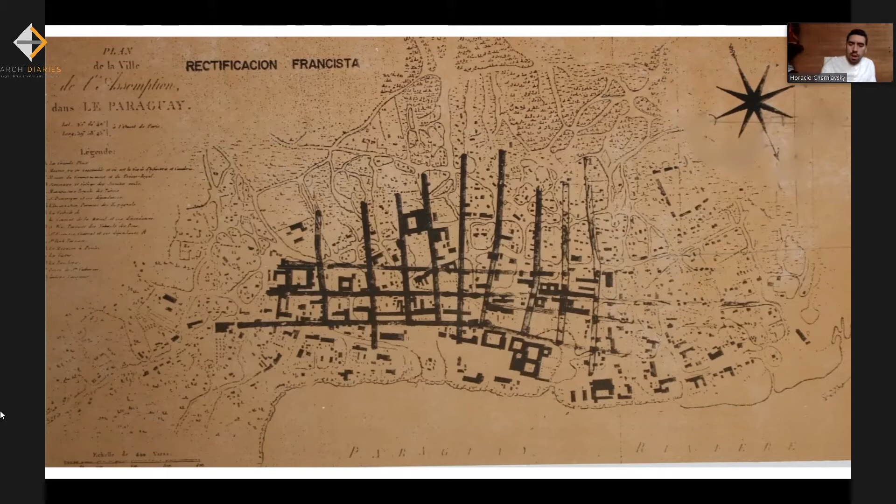So importing a wrong model is what today we still see as an urban problem, because of the rainfall and because it's a model that did not go along with the existing topography.

This is Asunción and the urban sprawl of the metropolitan region.

525,000 people live in Asunción, but 2.6 million people use Asunción during the day. And those 2 million people live in the outskirts of the city.

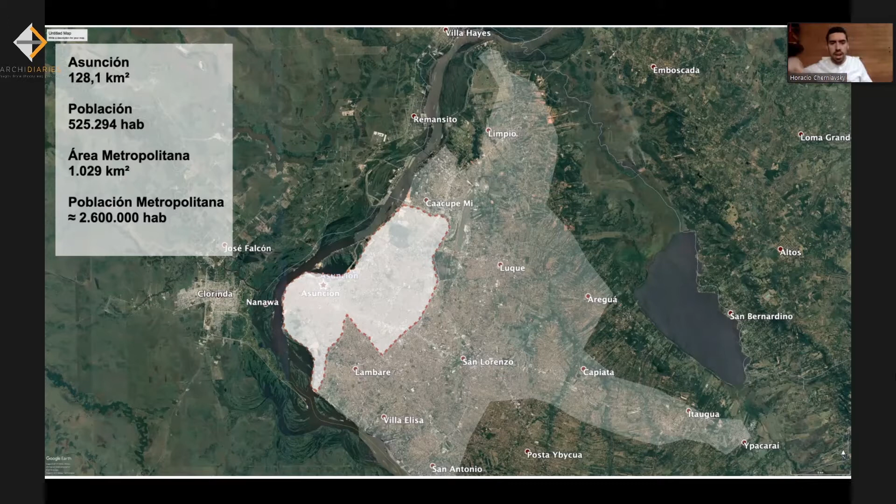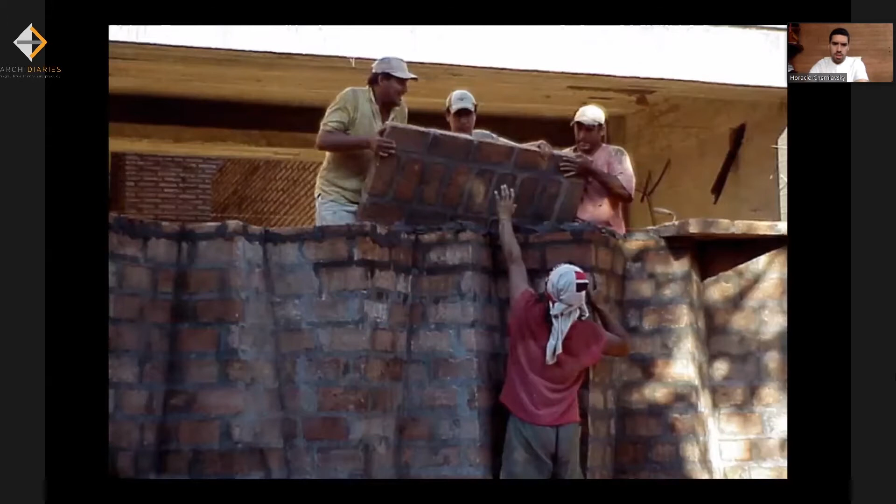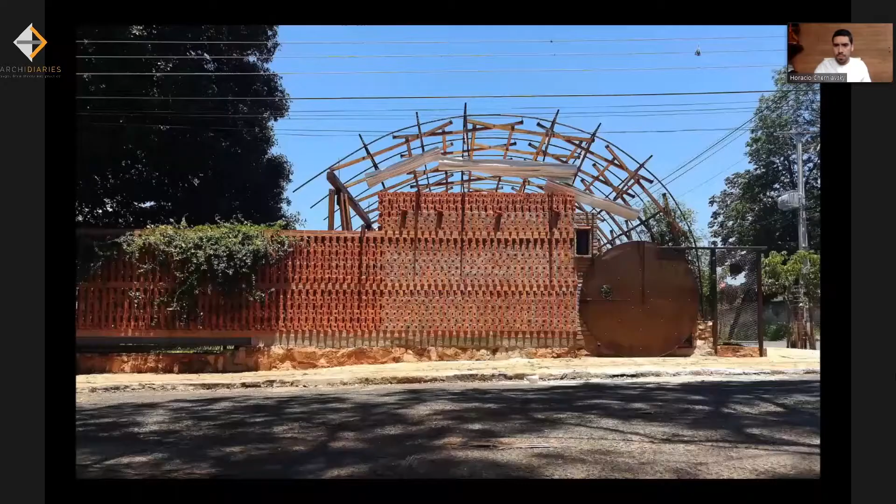All of this international and media attention that Paraguay has right now is something that came up in the last 20 years, with the architectures of Solano Benítez, Javier Corbalán, Luis Elgue, José Cubilla, whom I worked with, Sergio Fanego, Sergio Ruggeri, TDA, Miguel Duarte, Sonia Carísimo y Francisco Tomboli, Lucas Fuster.

These are some generations of architects that belong to a group of friends and colleagues that find themselves in the academic sphere, teaching at the public university. So we belong somehow to that group and train of thought that started 20 or so years ago.

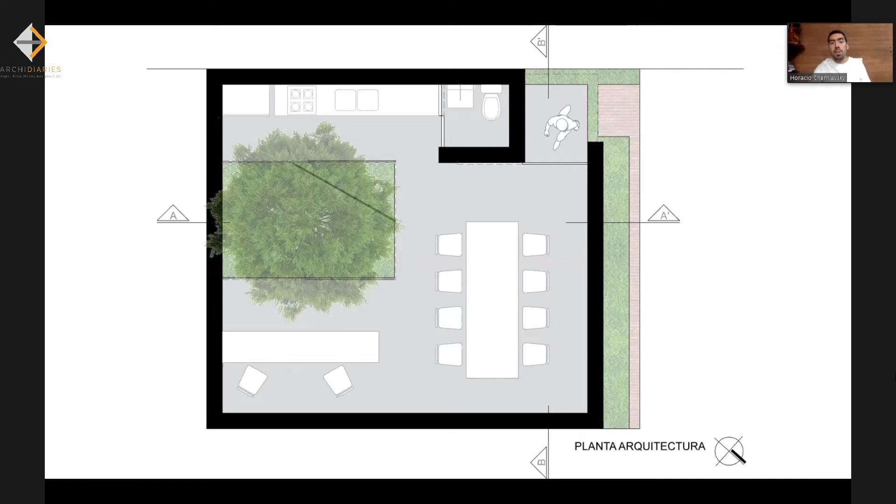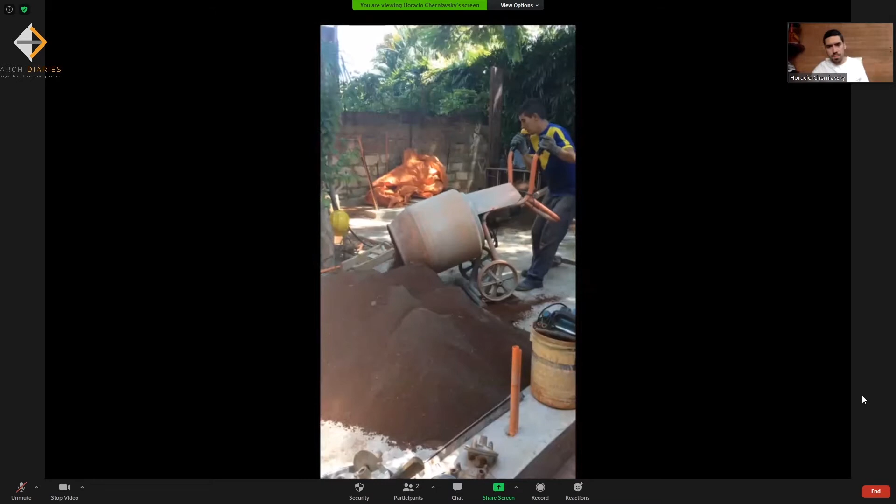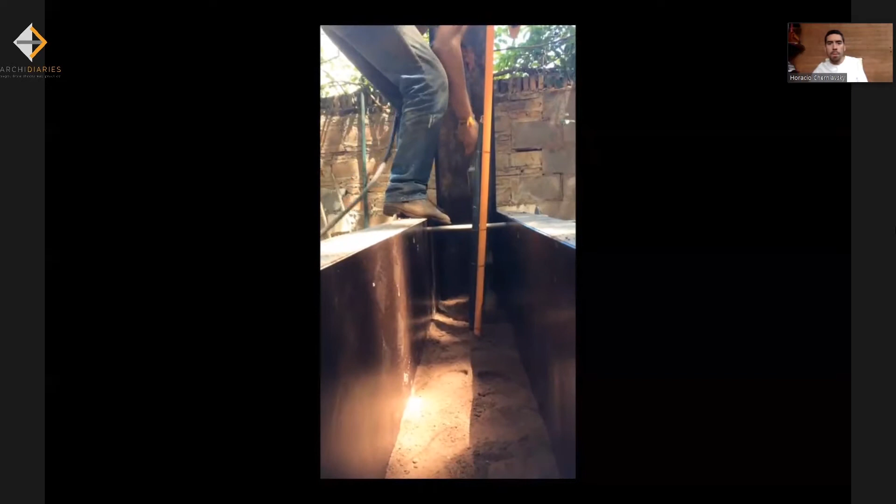The building techniques we use are earth walls that we built like this. We added 5% of cement to the earth. As you can see, the earth and the cement are very fine, and they have to be a little bit humid. So we used pneumatic pistons to compress the earth.

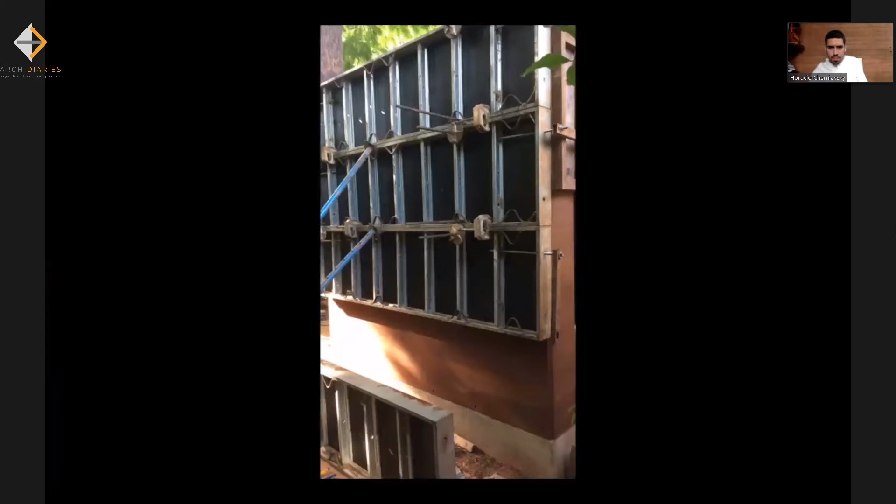That's the construction process, and that was our first wall. Building process. And those were the four workers that built the office. We like to give credit to them.

So this is how the space looked like once the light came in, and we need to speak about shadow in order to speak about light. And if we speak about cool places, which are places that we need here because of our climate, then we still need a little bit of light.

Natural light, so we decided to do this opening. That's related to the tree that's outside. We normally look outside of architecture because we find a lot of references for the work we do, and we find a lot of inspiration for what we have to do.

Eduardo Chillida is a Spanish sculptor, which we admire a lot, and it's always been a reference for us. The idea of the sculpture of space with matter and light is something so fundamental that we're tied to that type of thinking.

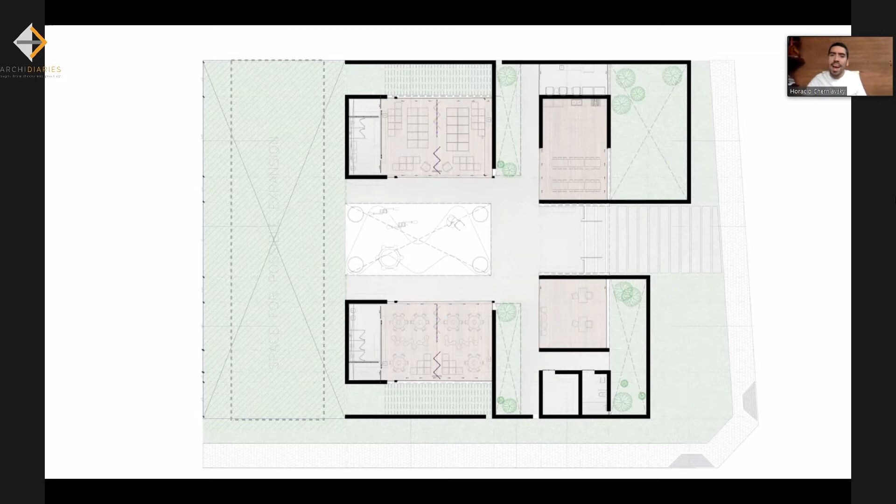So this is the floor plan of the project, and as you can see, the walls are the lines that create the space. So from the outside, you see it as a closed bunker with not a lot of information, but like a protection and shadow. But once you go on the inside, you see light, and you see the carved spaces that I talked about.

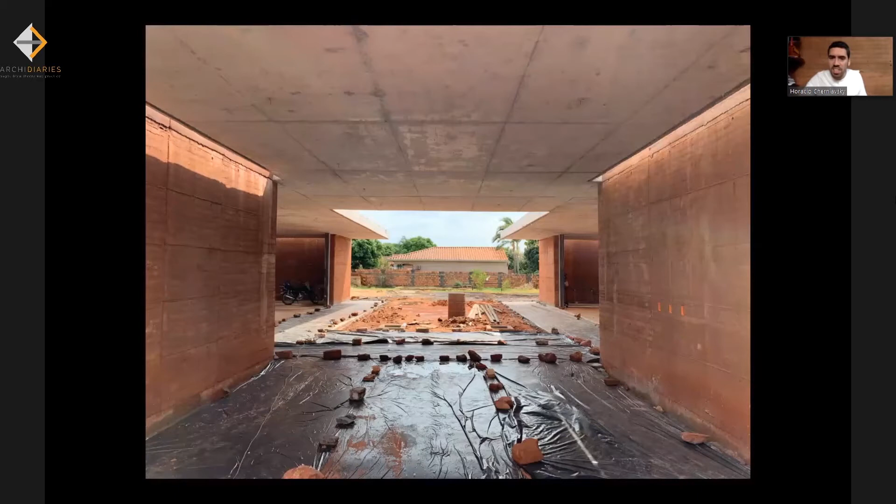This building is still in construction. We're almost done.

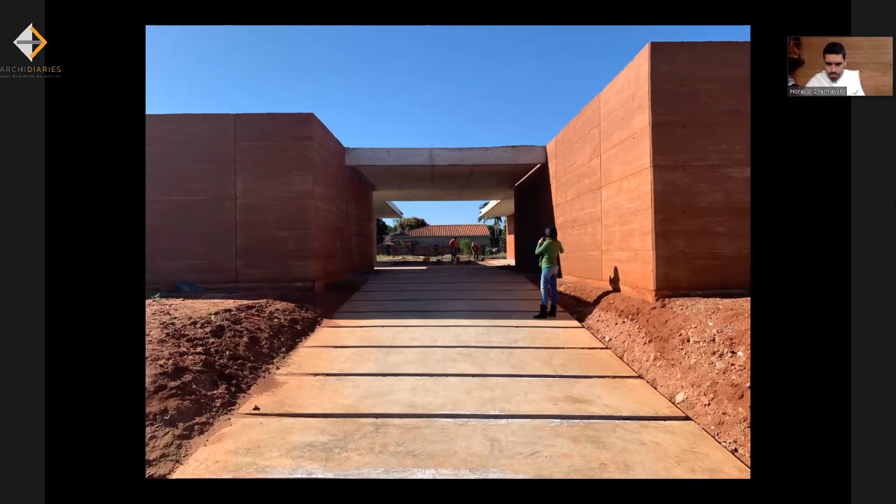And you have inner patios that ventilate all of the spaces. You have shadow. We're starting to have green inside. So it's a space that's protected, a space of shadow, but also of light and green. All of these are patios.

And from the outside, it's almost like a bunker, protected from the heat that we have here.

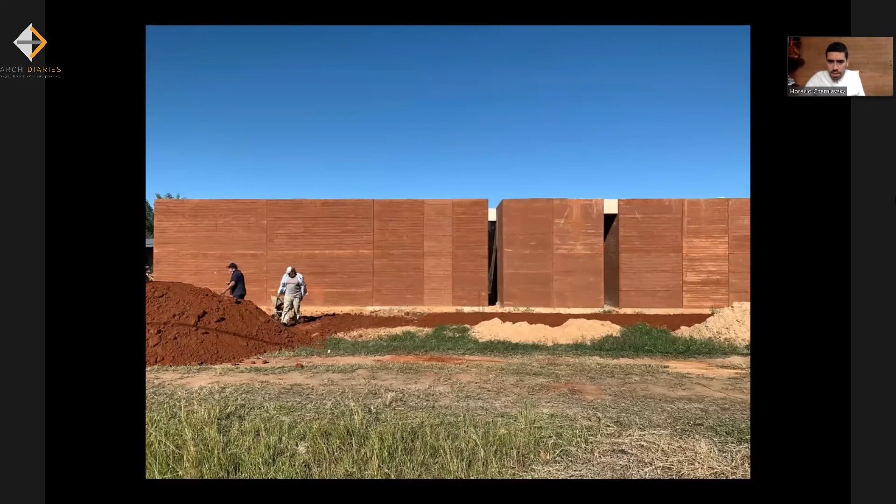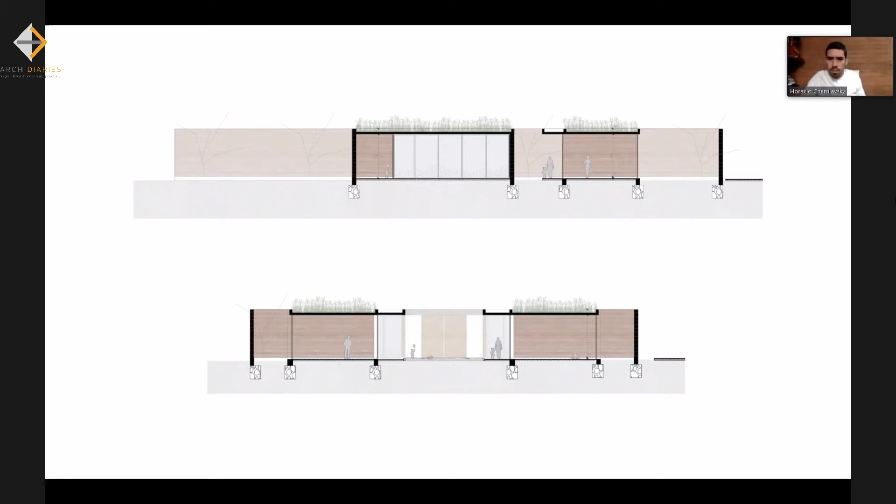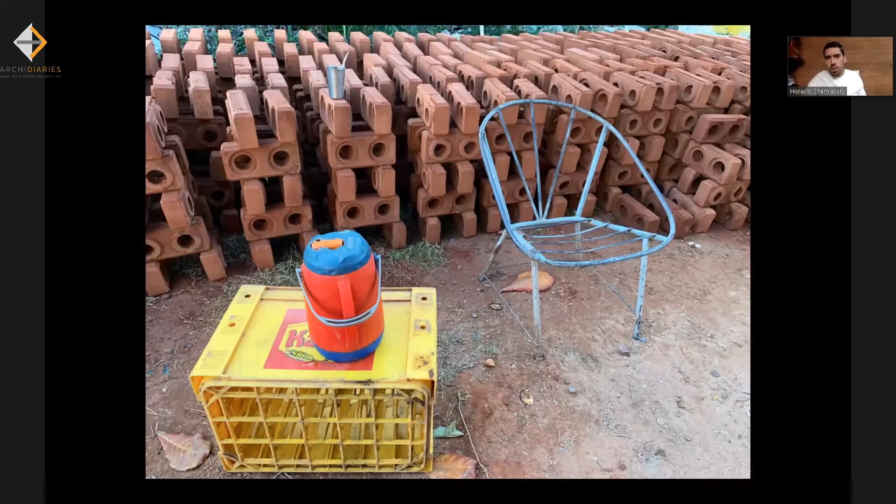And continuing with the use of earth, we also are starting to make bricks for another project. And I like this image because it shows a little bit of the essence of work here in Paraguay. What you see there on the left side of the image, on top of one of the bricks, is tereré. Tereré is a traditional drink we have inherited from the Guaraníes.

It's cold water with herbs, yerba mate. So it's very refreshing, and it also gives you a pump of energy to work.

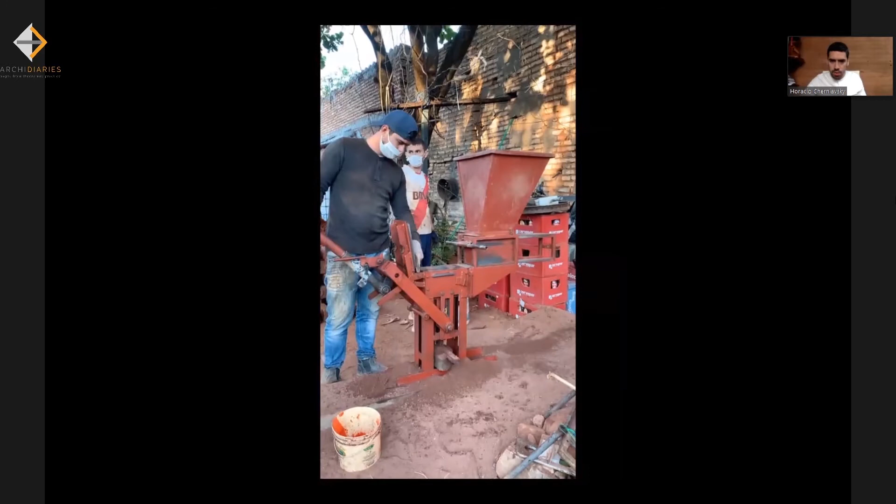So this is how we're using a CINVA Ram, which is a machine that's been created in the mid 1950s, I think. It was patented like 50 or 60 years ago, and we're adding 10% of cement, a little bit more than the rammed earth walls, because the module is smaller and it needs a little bit more coherence.

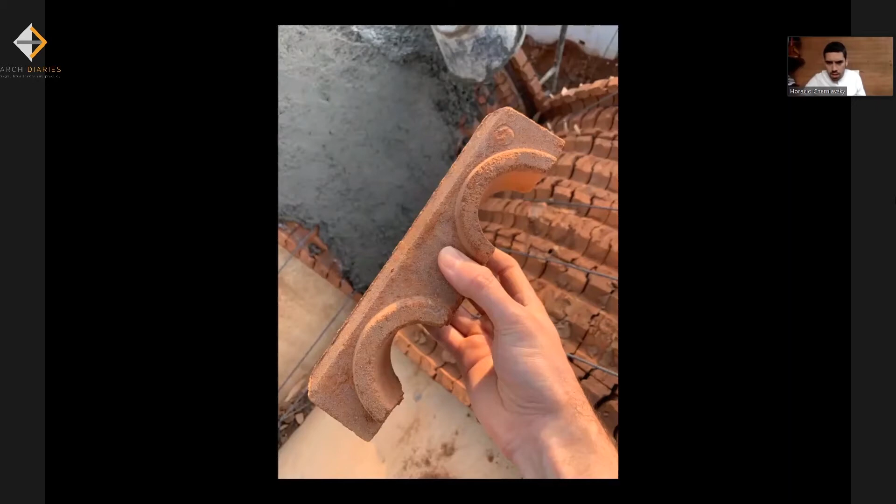We're using earth also as a module to build walls and vaults. That's the brick, and we're doing ceramic vaults with half of that brick. For the walls, we use the brick in its entirety, and for the vaults, we use half of the brick.

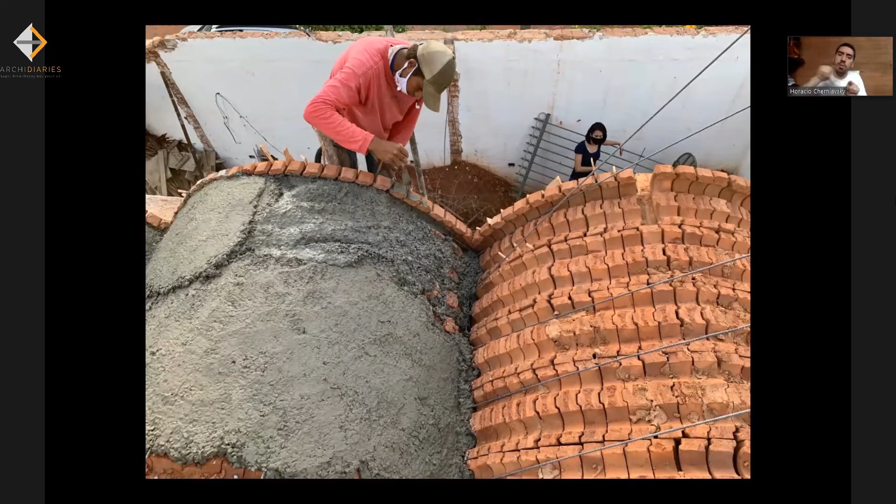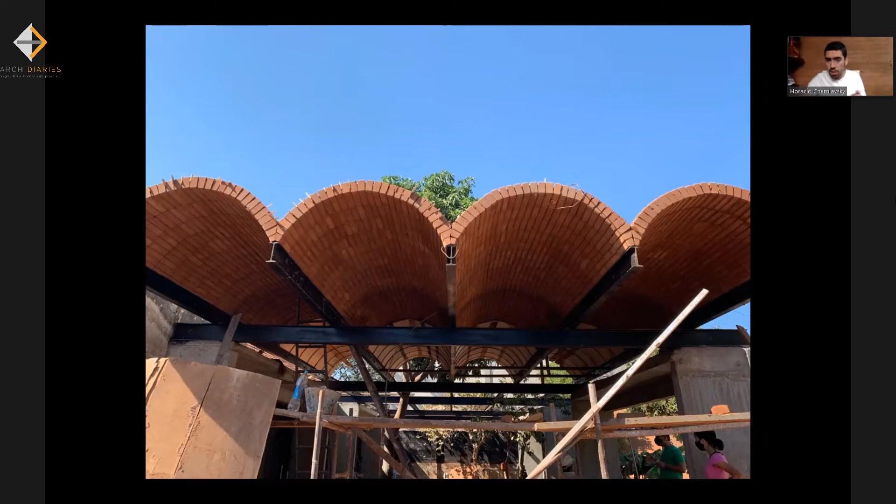This is a project we're building right now, and it's starting to look like this. It's a small house in Asunción, and those are the vaults with the earth bricks, compressed earth blocks.

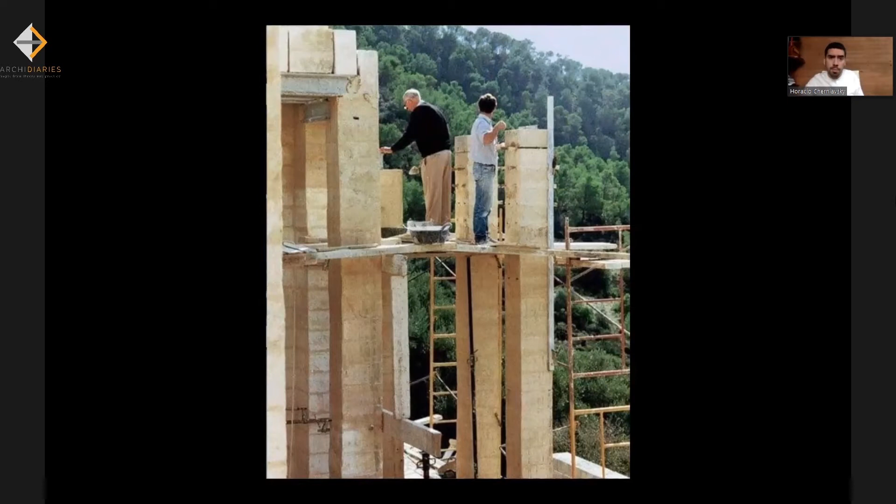The references we use in the office are artists, builders or architects that are normally very related manually to the work they make: Jorge Oteiza, sculptor, Constant Nieuwenhuys in his workshop, Jørn Utzon building his own house in Mallorca, or Frei Otto always testing his own ideas. These are some of the references we like because they are very related to the work they do manually and they live in the spaces they create.

It's something we normally tend to look at in the office. That relation with materials - we are surrounded by materials, but we as architects must look at them differently. These are images of materials found in Asunción near the landfill area, and these are the materials that we can use for construction.

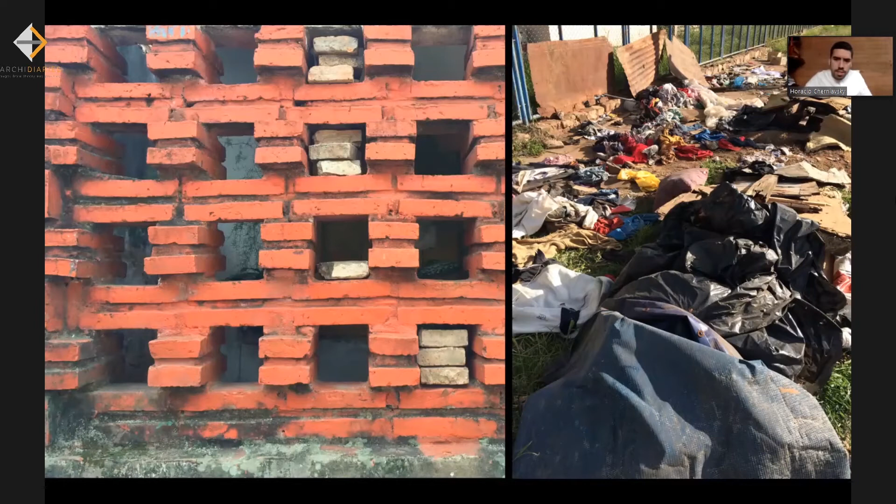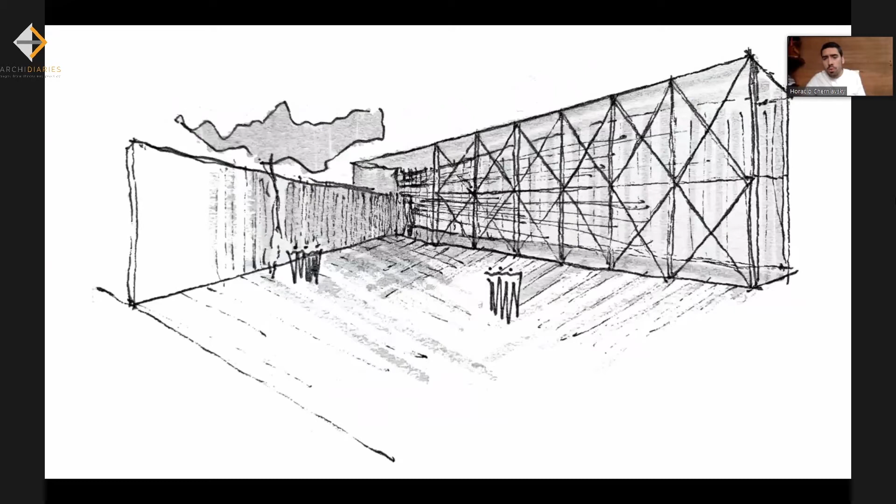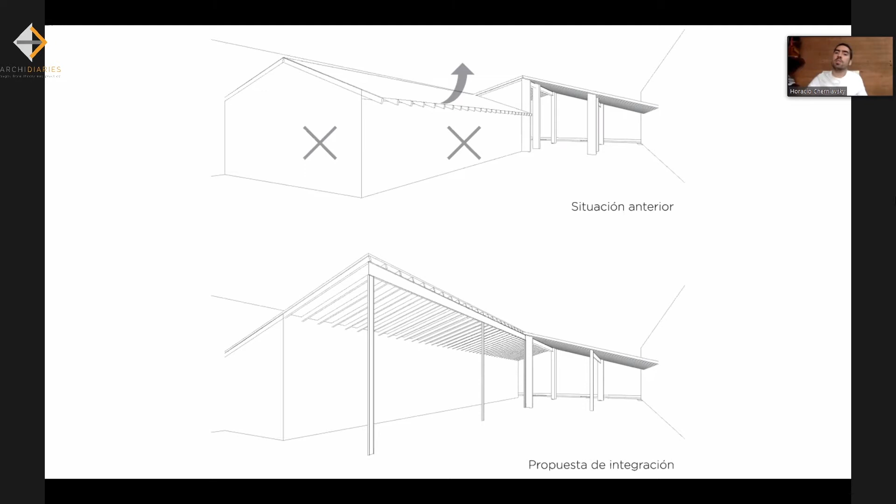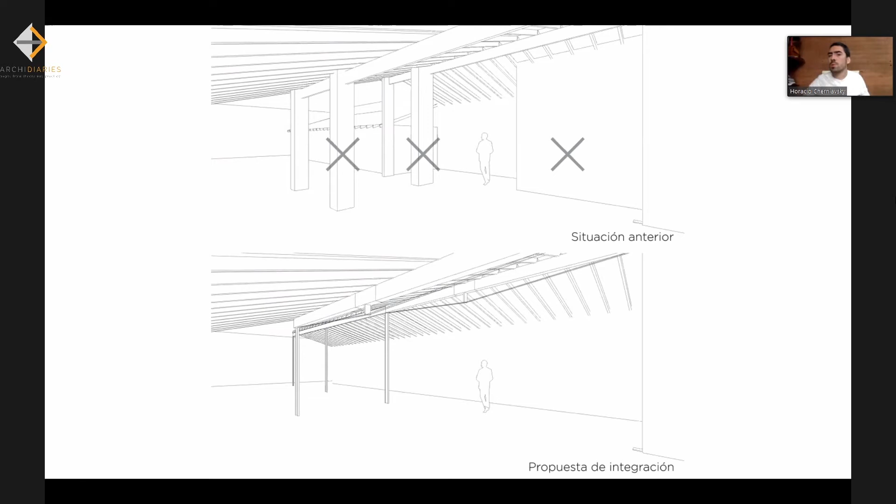With all of the material that we started breaking, we started to construct the walls that look like this.

From the outside, we used construction materials, such as the scaffolding and local artisanry, like the plant pots, ceramic pots. This is a west side facade, so we have to protect from the sun, and we used green with traditional ceramic pots.

So the construction phase is impregnated in the whole project. It looks like a building site, basically. And we also used the roof tiles to build the bar. So waste is also now seen as a construction material.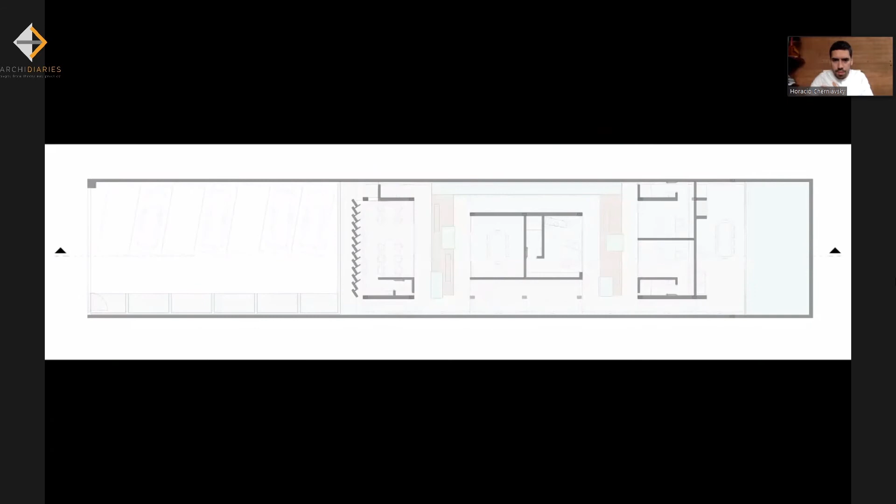These are some offices that also correspond to the same scheme that we did in the house, which is inner patios, in-between patios. It's a small office where you have these in-between spaces of shadow and light.

So the office space is never a closed, cold space. It's always, for us, an open space related to nature, that has natural ventilation, natural light, and you find these spaces where you can encounter other people and talk and drink and be outside. Natural light, natural materials. And the materials we use are always the same materials we use in every project: wood, concrete, bricks, some metal, earth.

Also, the protection from this facade is protecting the inside because it's towards the west.

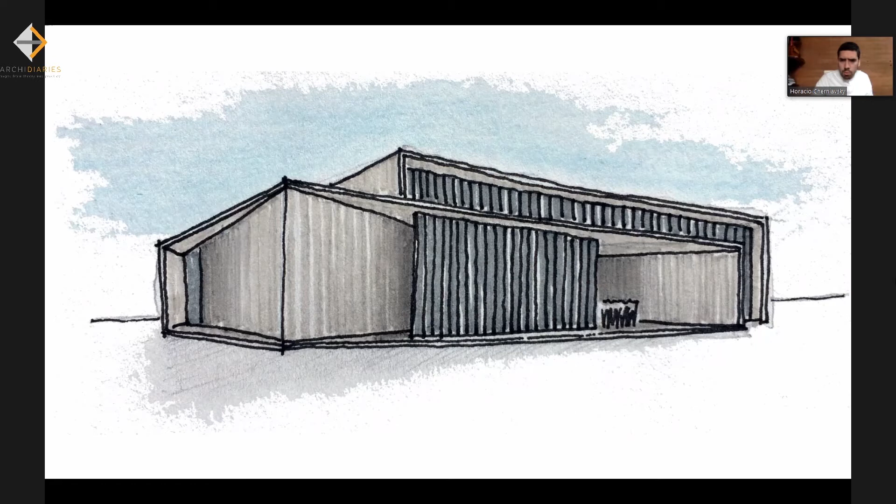This project is an international competition we won like 3 years ago, and it's just finished building last year. What we had was this old building, and the competition wanted a new temple for the Jewish community, a new synagogue. We decided to leave some parts of the existing building, the structure, the roof, or parts of the roof, but transform that construction in order to give a new space identity and a new image.

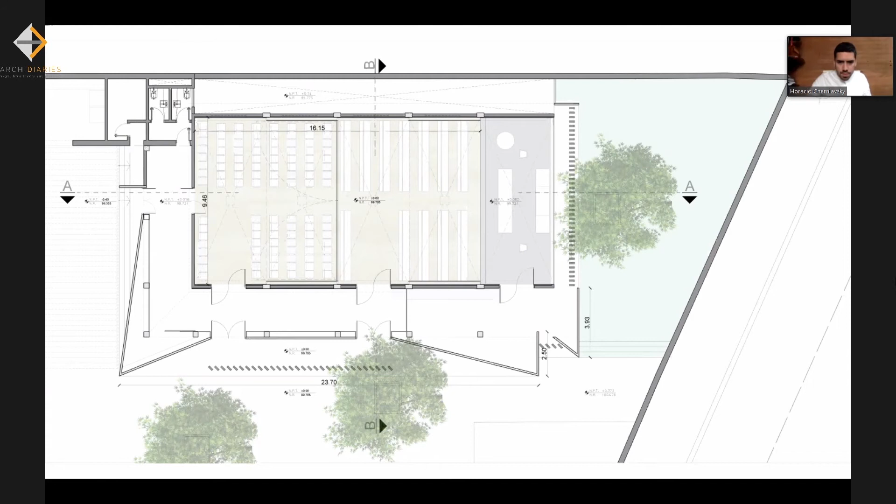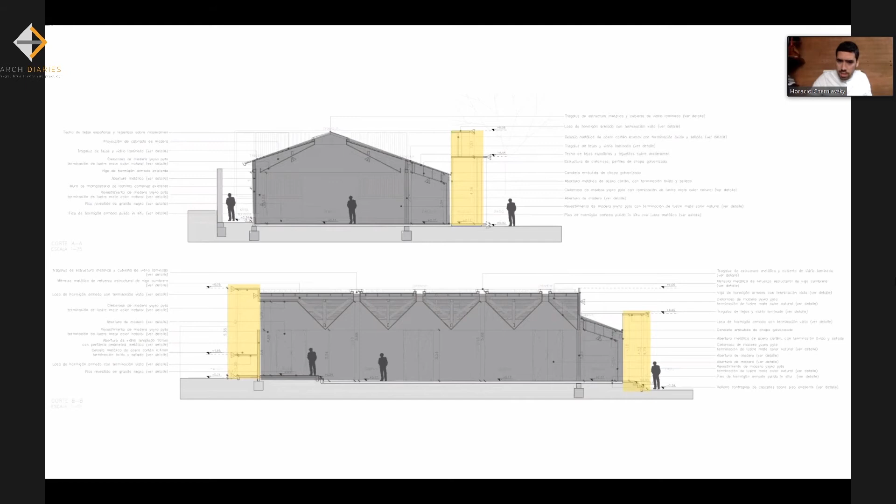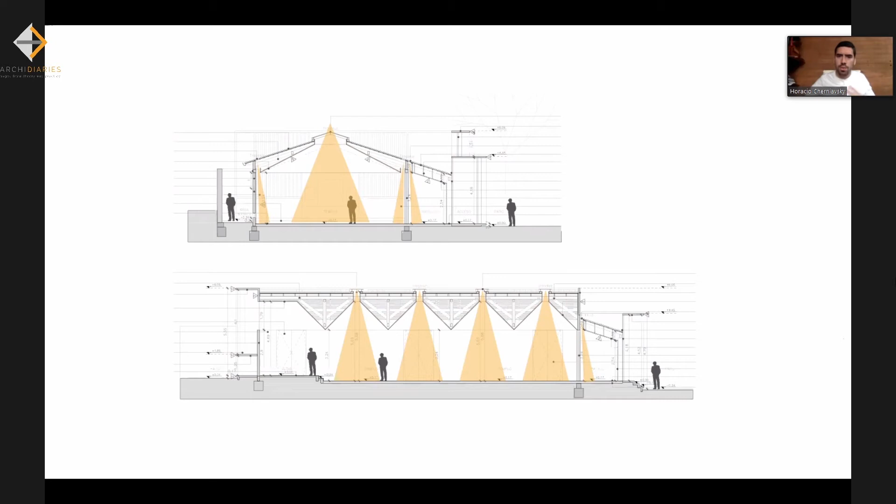This is a floor plan where that was the existing part of the building, and this is what we added in the floor plan. In a section, you can see the parts we added, and those are the skylights we added also, in order to give natural light to the inside. So that's the existing building.

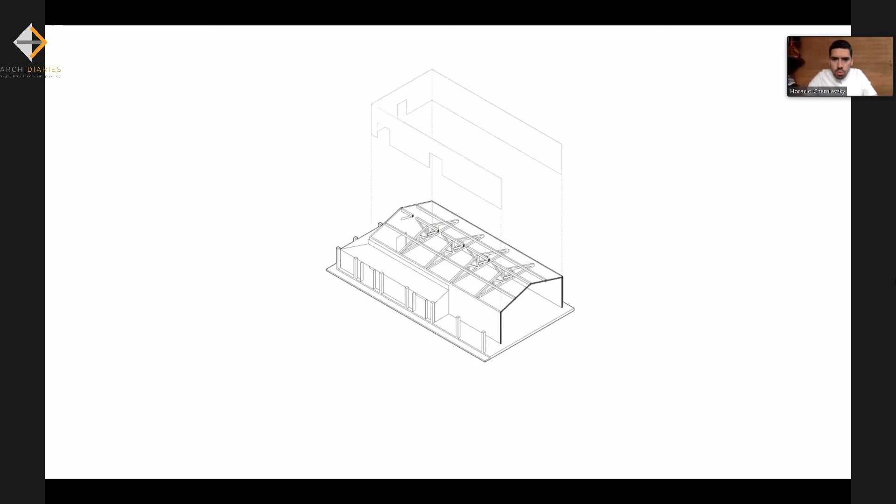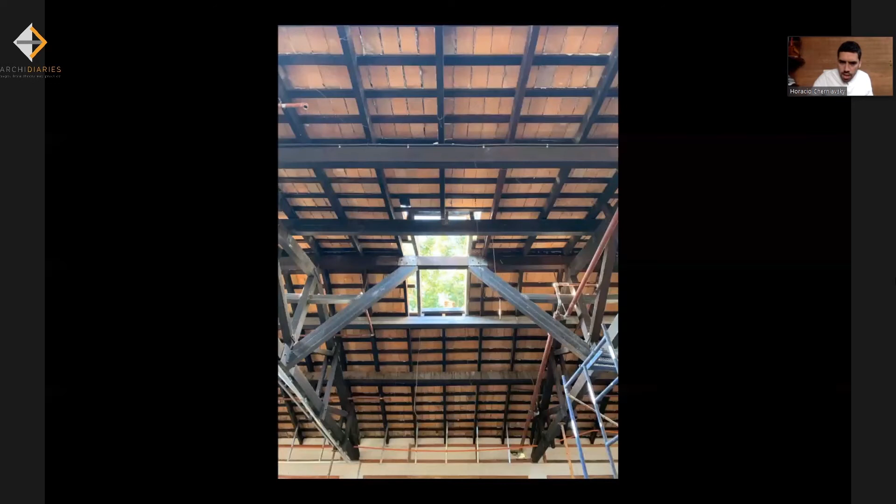What we did is we modified the structure in order to have the skylights. We added a new corridor on the outside. We added that outer shell, the protection, and the new roof. That's part of the modifications we did for the structure.

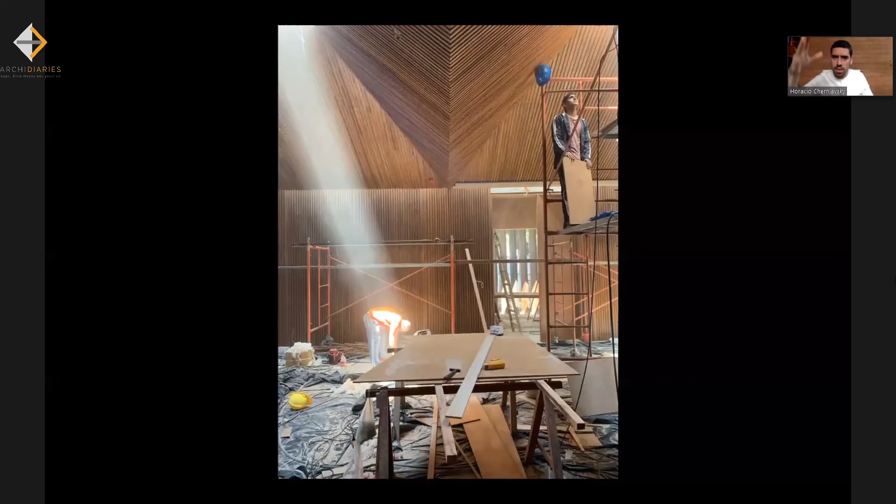Those are images of the construction phase where you can see the natural light as the protagonist of the inside. These are images of the finished construction. And that's how it looks from the outside. You have an outer shell of concrete and metal that gives a fortified image of the inside.

You have these sequences of spaces before you get to the inside. You have this first corridor, then a second corridor where you have more silence and get prepared to get inside the building. This corridor has natural light now, and it has other materials.

The outside had concrete and metal, which are very tough and cold materials. And then as you go inside, you have wood and natural light that give you another atmosphere.

On the inside, you have a space of shadow, but where the natural light is the protagonist. So trying to separate the elements, walls are separated from the roof, and you have these skylights in between the existing structure.

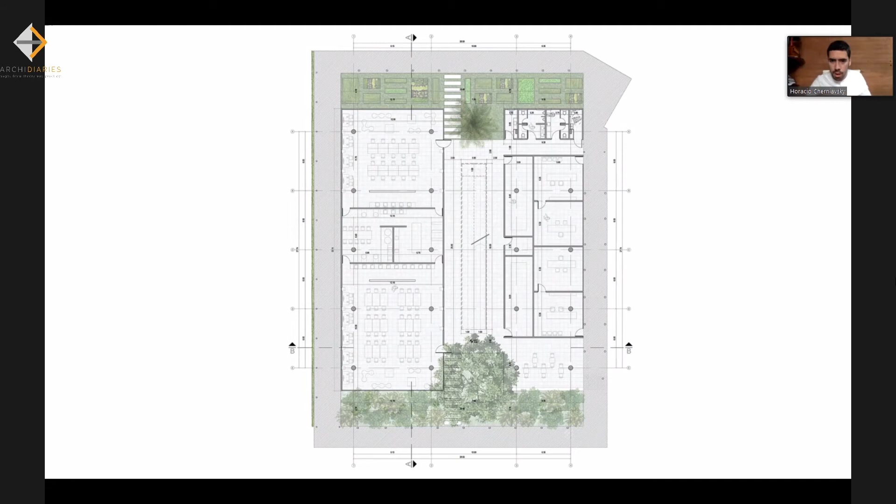This is a floor plan where you see the two pavilions and the ramp in between them and the tree in the middle. These are some images just from my cell phone of the building, how it looks.

Last Saturday we went there to make the official photo shoot, so that's going to be done by next week. These are our photos just by my cell phone. As you can see, the building creates this protection from the sun, this brise soleil. It's a ceramic brise soleil.

So all the classrooms have glass and a relation towards the outside. This is an image of the ramp in the last level, and how we have this protection also from the sun, but letting in the natural sunlight. This is the ramp.

We wanted to give the classes an open view towards the outside, but always protecting from the sun and the weather. Since we don't have a lot of technological developments here, we decided to create this brise soleil in an artisanry way, craftsmanship, using local craftsmanship and local materials. This is how the building looks with the context surrounding it.

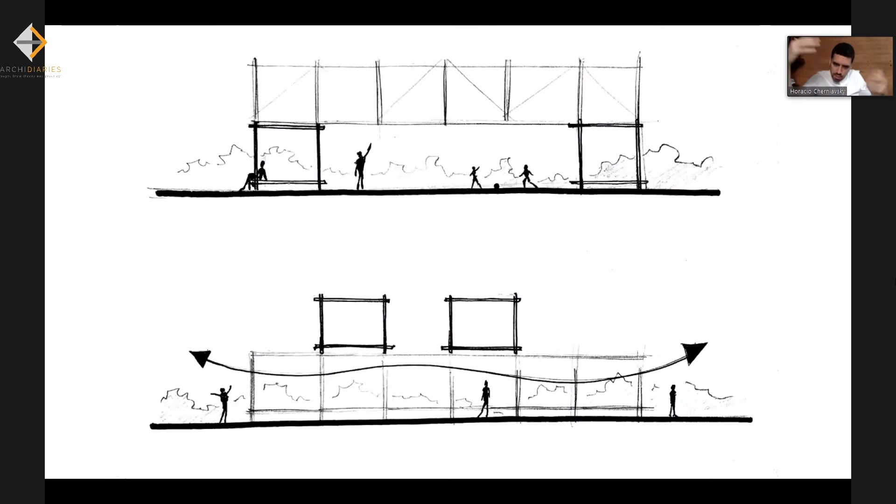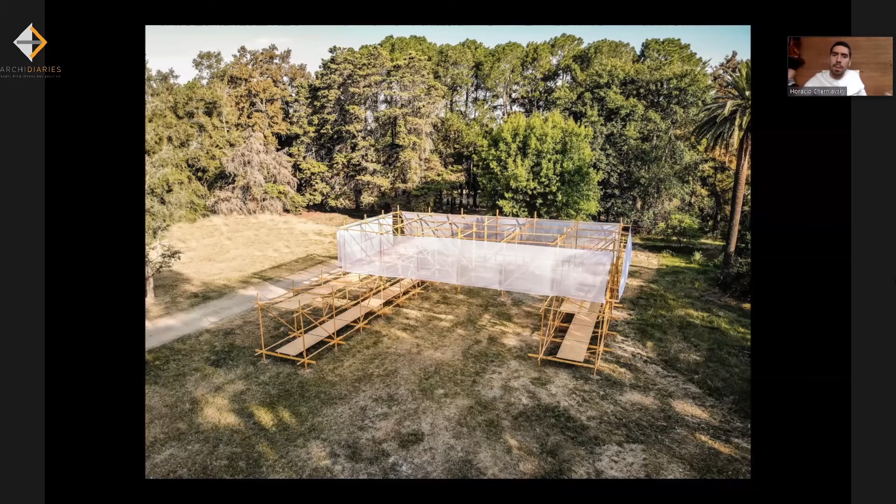So that's why we created these 2 pavilions and this big roof on top that creates this open but protected space. These are images of the final construction. It's a really big space that could be used for a public space or public program.

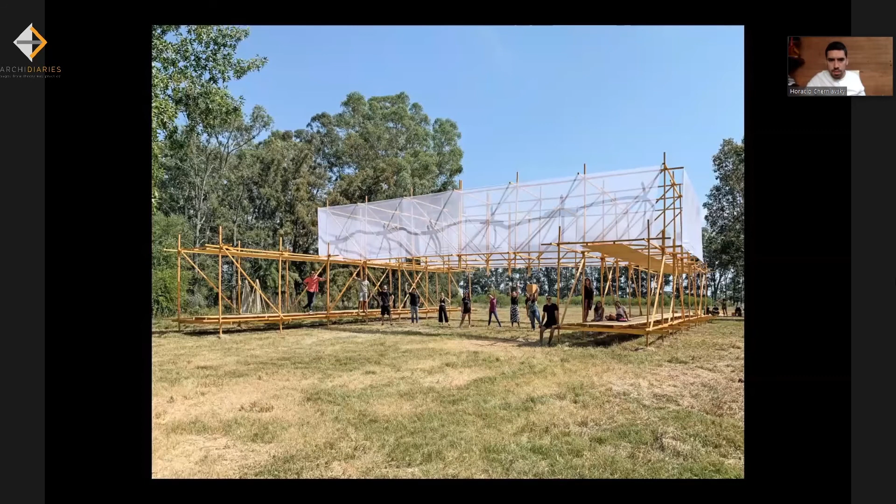This was built with 12 students and the team in 1 week.

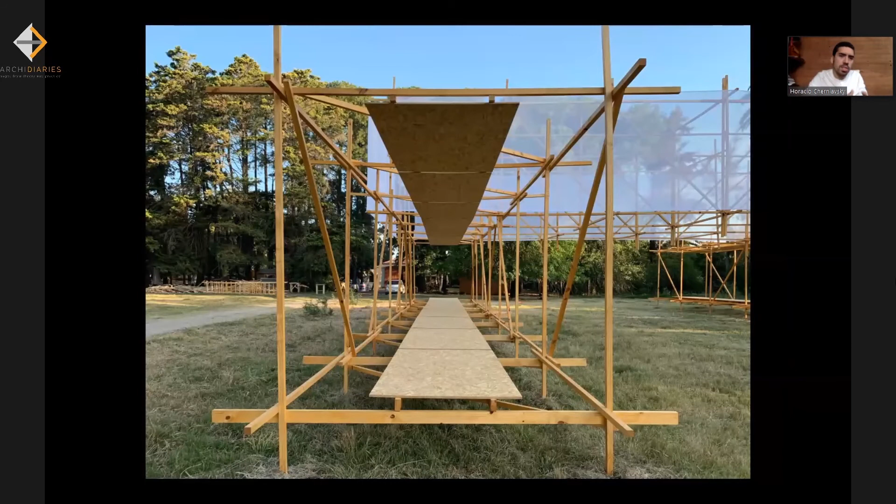And as you can see, all of the elements are used in its entirety. This type of exercise is material exercises that for us are very important.